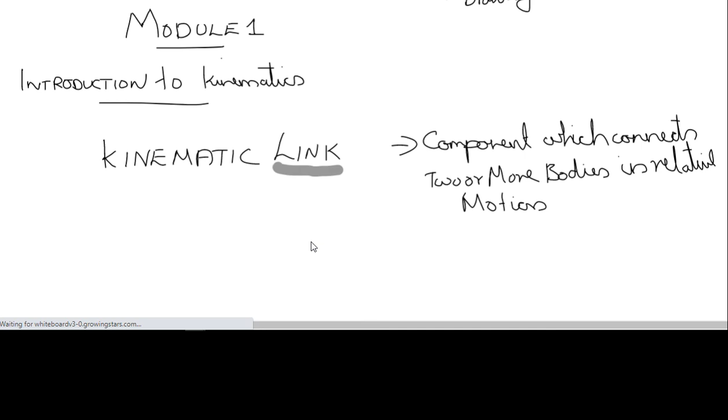So you can define a link as a component which connects two or more bodies in relative motion. So, examples. You have seen engines, IC engines and all those things. There are many links in that. For example, the first one will be the connecting rod.

The connecting rod is a link which connects the crank to the piston. Another example you can draw is the piston itself. The piston is a link which connects the cylinder, or the cylindrical surface, to the connecting rod. Like that, you can get different links in the IC engine itself, or other than that you can also get different examples. And links are classified into different types.

The first one is the rigid link. A rigid link means you cannot change the shape of the link. That means it will be a solid link, it will be rigid. You cannot change the shape. All of these are examples of rigid links: connecting rod, piston, each one is an example of a rigid link. The next one is a flexible link. That means the link will be flexible. The most common example you can get is a chain.

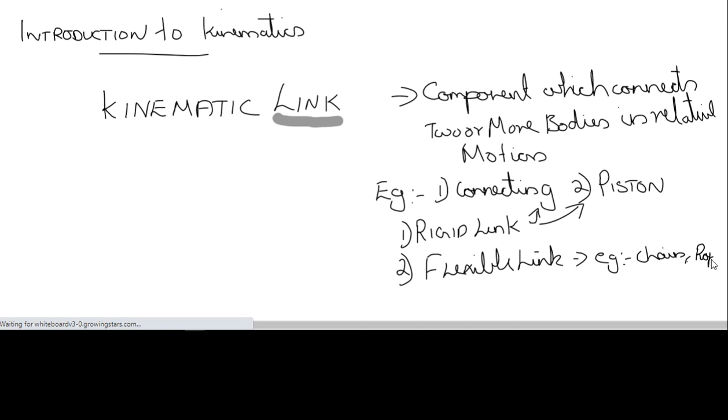A chain is a link which connects the rear and front end of a vehicle, or the rear end engine of a vehicle, or the gearbox of a vehicle. Like that, a chain is also a link. That is a flexible link. You can also imagine a rope to be a flexible link. So a flexible link is flexible compared to a rigid link. A rigid link you can also see in your propeller shaft, or the axle that connects two wheels and the differential; all those things are rigid links. So flexible links are chain and rope. They are flexible in nature.

There is also another classification of link called fluid link. Fluid link means, we have seen hydraulic presses, hydraulic lifts, hydraulic jacks and all those things. In those, the link between the moving element and the piston is a hydraulic fluid, or different kinds of oils are used. So that is a fluid link. An example would be a hydraulic press. Or pneumatic: pneumatic means instead of fluid there will be air. A pneumatic press or pneumatic lift, that will also be a fluid link.

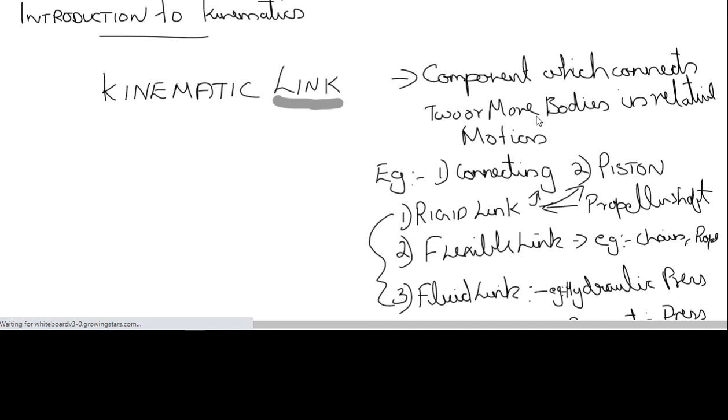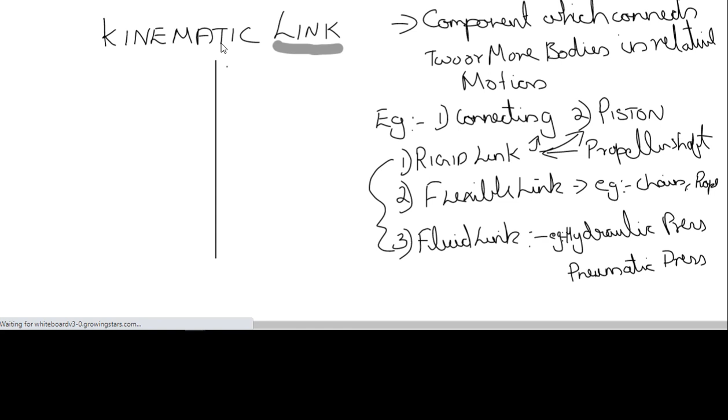So these are the basic classifications of kinematic links: rigid link, flexible link, fluid link. And the link is a component which connects two or more bodies which are in relative motion. After the link comes what is known as kinematic pairs. Kinematic pair. And what is a kinematic pair?

A kinematic pair is nothing but two links connected having relative motion with each other. So two links connected having relative motion will form a pair. Pair, you know, is two. So again, a link is a component which connects two or more bodies. When two links are connected and they have relative motion, they form a kinematic pair. All these definitions are important.

And after the kinematic pair, there comes the kinematic chain.

Kinematic chain means kinematic pairs connected with a constrained motion or a desired motion. So kinematic pair or pairs, I'm also putting plural, pair or pairs connected to constitute a constrained motion. Constrained means we are constraining that motion to the desired requirement of the mechanism. So we will be constraining the motion of the piston with the cylinder, so that the piston only reciprocates inside that cylinder. So that is a kinematic chain. Two pairs connected to constitute a constrained motion will constitute a kinematic chain.

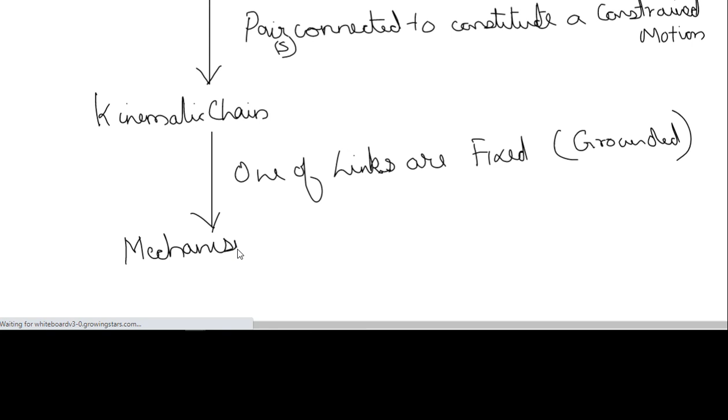So again recapping, a link connects two or more components which are in relative motion, and when two links are connected and have a relative motion, it is known as a pair. And when pairs are connected to get a desired motion or a constrained motion, we will go in detail into what constrained motion is later. When two or more pairs are connected to get a desired motion, it is known as a kinematic chain. And if one of the links of a kinematic chain is fixed or grounded, that means one is stationary and others are moving relative to it, then it is known as a mechanism.

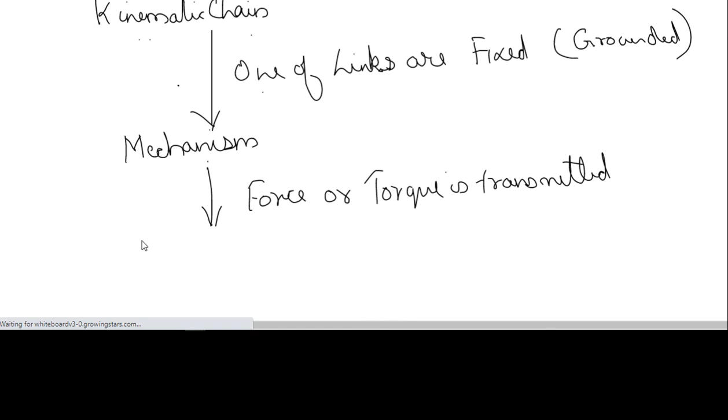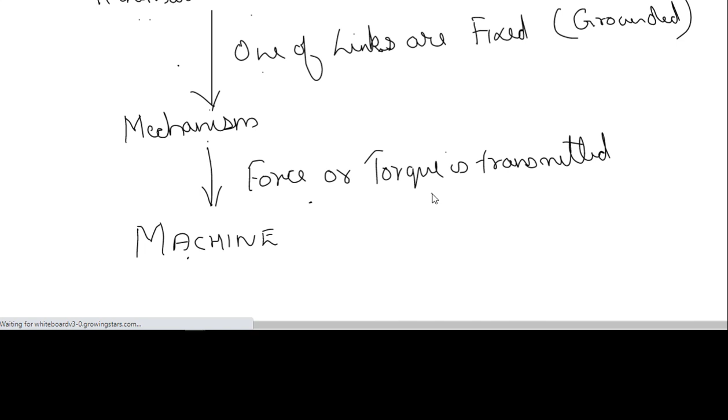And in a mechanism, if force or torque is transmitted, then that mechanism is known as a machine. When a force or torque is transmitted through a mechanism, it is known as a machine. So going in reverse, a machine is a mechanism which transmits force or torque, and a mechanism is a kinematic chain in which one of the links is fixed. A kinematic chain is a combination of kinematic pairs which constitute a desired or constrained motion. Kinematic pairs are the connection of two or more links having relative motion to each other. And a link is nothing but a connection of two bodies which are in relative motion to each other.

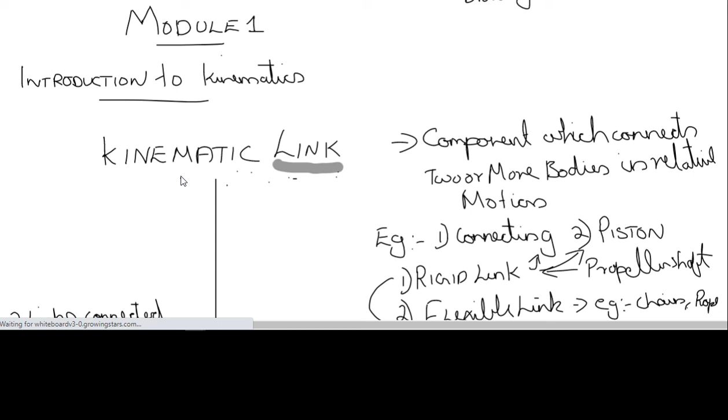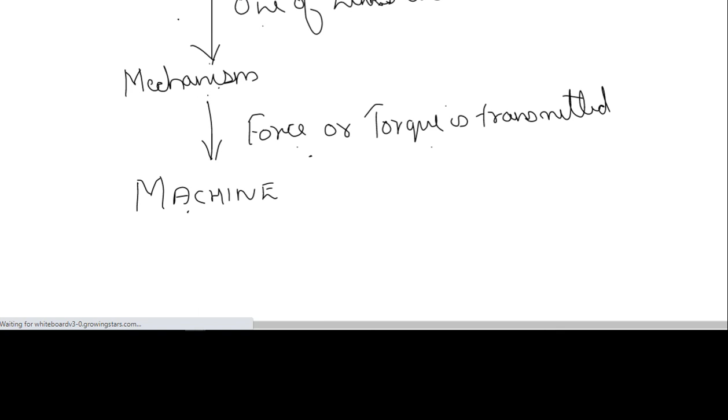So these are the basic components of a machine or a mechanism. So you see how a machine is defined. For defining a machine, you should know the mechanism. For defining a mechanism, you should know the kinematic chain. For defining a kinematic chain, you should know the kinematic pair. And for the kinematic pair, you should know the link.

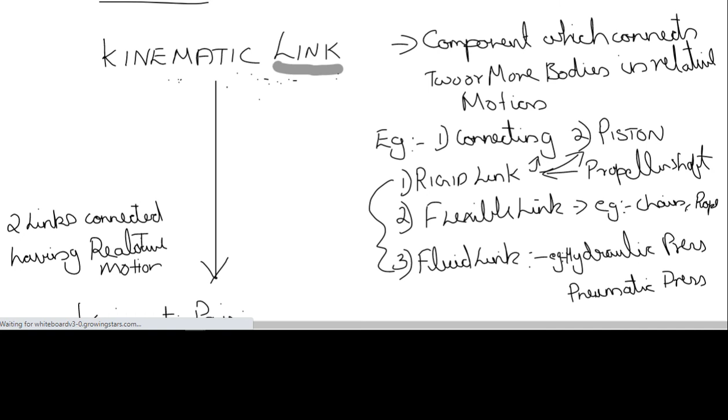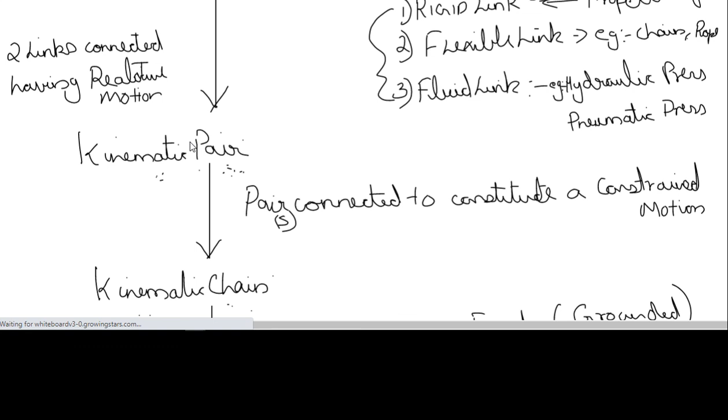So to explain this in a simple way, we have connecting rod and piston as our kinematic links. When the connecting rod, piston and crankshaft are attached with the cylinder, reciprocating motion is converted into rotating motion. So that forms kinematic pairs between piston and cylinder, piston and connecting rod, and crank. And when these pairs are connected together, they form a constrained motion, converting reciprocating motion of the piston into rotating motion of the crank. So that forms a kinematic chain, and in that the cylinder is fixed, so it forms a mechanism, called the slider crank mechanism, which we will go into in detail.

And when force or torque is transmitted towards the wheel, or wherever that reciprocating force is converted to rotating motion and transmitted using some shaft or chain, then it forms a machine. That machine we call an automobile when it is used for traveling purposes, or a generator when used for generating current. So that is a simple explanation of link, pair, chain and mechanism for IC engines.

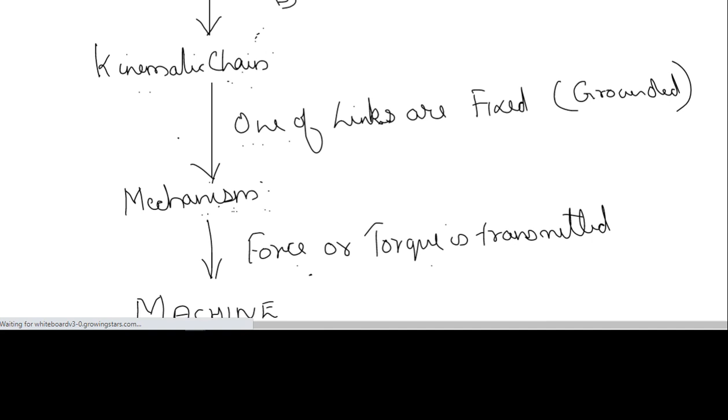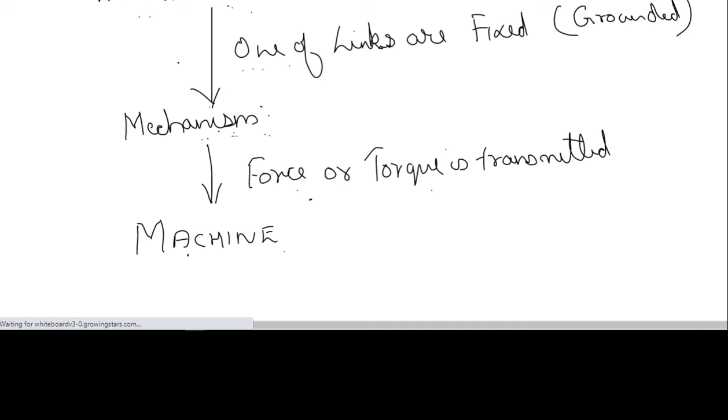Piston and connecting rod form the links. Piston and connecting rod when connected form the pairs, and when the pairs are connected to form a constrained motion, that is the piston moves inside the cylinder to form reciprocating motion, it becomes a chain. And when the cylinder is fixed inside a vehicle or somewhere, that forms a mechanism. And when force is transmitted from that crank towards some useful purpose, it forms a machine. So this forms the basic component of a machine or a mechanism.

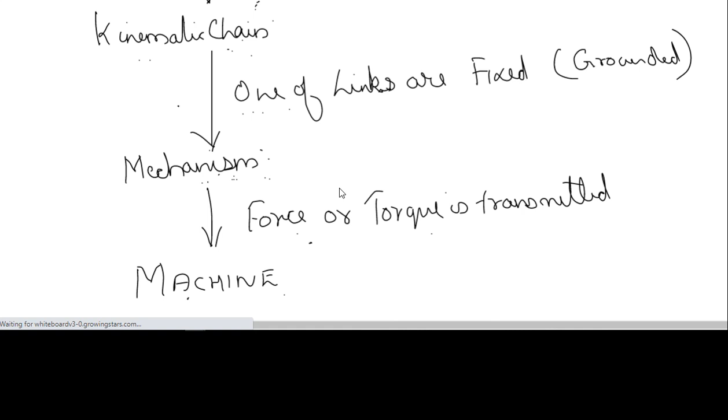In the first module, we will go in detail into the different basic mechanisms that we should know. There are different mechanisms like the 4-bar mechanism, slider crank mechanism, quick return mechanism, Whitworth mechanism. Lots of mechanisms are there. Most of them you have seen, only the definitions are not there. So we will go in detail into each of the mechanisms.